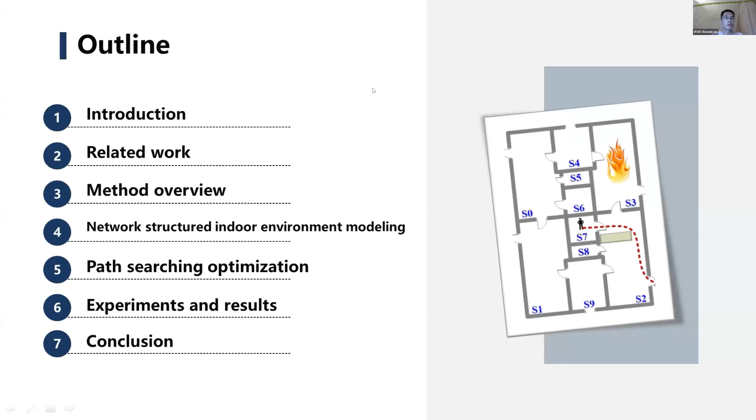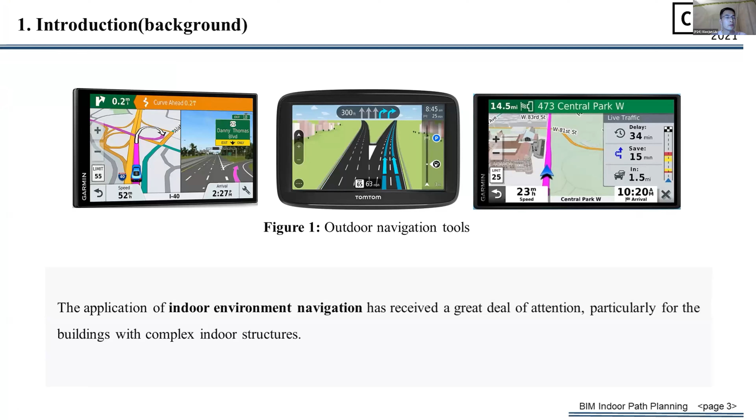introduction. With the popularity of navigation tools, especially those of smartphones or other lightweight devices, the application of indoor environment navigation has received a great deal of attention, particularly for buildings with complex indoor structures.

Their irregular and crowded indoor environment can result in emergencies at a high probability. One of the main reasons for these serious incidents is that indoor escape and evacuation are not efficient and timely. To avoid this situation happening, it's urgent to explore a lightweight indoor path planning method to meet the requirement of emergency indoor route finding.

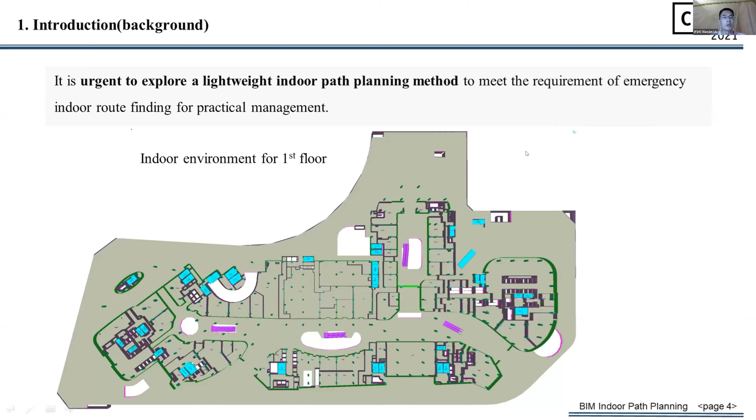For the building data, BIM has become the core technology in smart buildings, and its data has also been regarded as the source of BIM building information. IFC, as an international mainstream standard for BIM technology, is capable of storing both geometric and semantic information of building models, as well as their relationships. In this paper, we take IFC as our input data format for indoor environment analysis.

However, its rich information also brings disadvantages. For example, huge volume, high rate of redundancy, and lack of spatial information for data processing in practical applications, especially for lightweight indoor path planning.

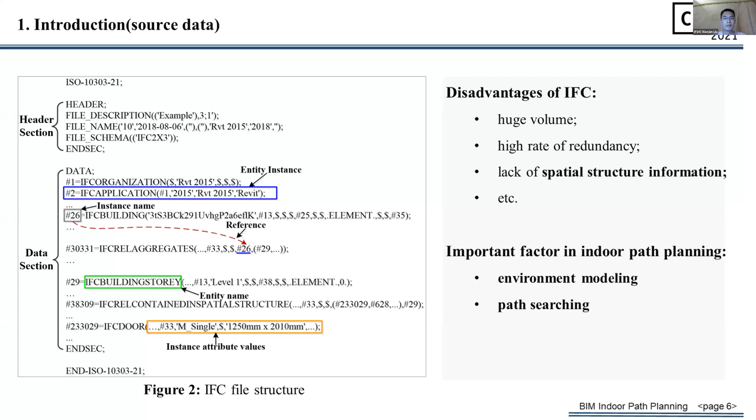Observing that both environment modeling and path searching are important, we integrate these two together with a lightweight approach, and our main contributions can be summarized as: first, a lightweight framework is designed in which all the online computation for a whole building is decreased to no more than 2 local interior spaces.

Second, a multi-layered network structure is proposed for indoor environment modeling and a corresponding automatic method for this structure generation. Third, a heuristic optimized A-star algorithm is implemented to speed up the shortest local path searching, especially for the case of path ends in a narrow corner.

As described above, we also give related work on indoor environment modeling and path searching algorithms. In indoor environment modeling, works for GIS appear relatively early, yet fewer works for BIM buildings are related with path planning. In addition, cell grid or topological structure is mainly used for modeling structure.

In path searching algorithms, the traditional and intelligent categories are classified by technical principle. In contrast, the latter category is more apt to address path planning with stochastic processes, while the other, which we are more interested in, is definitively capable of converging to a shortest path.

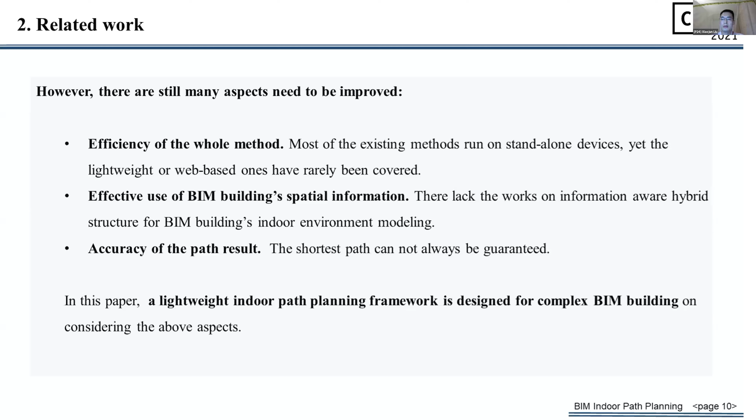In this paper, a lightweight indoor path planning framework is designed for complex BIM buildings considering the above aspects. As a web-based method, we describe our whole task as JPath, with online and offline procedures corresponding to the operations of the front end and the server side.

Meanwhile, due to resource limitations, we seek to develop our lightweight approach in which as large a portion of the computation as possible is designed to be offline, minimizing the resource consumption of the front end.

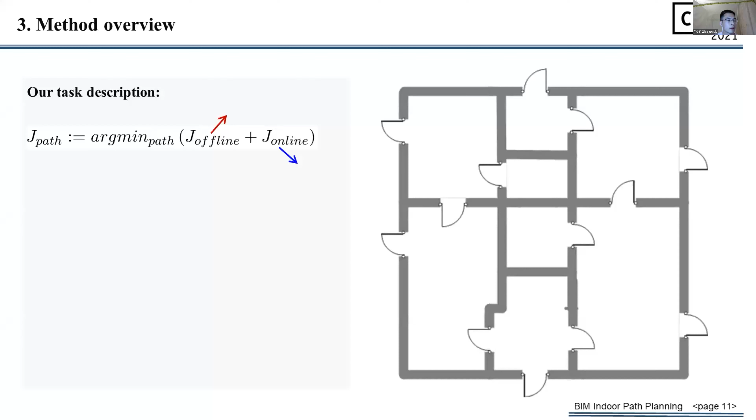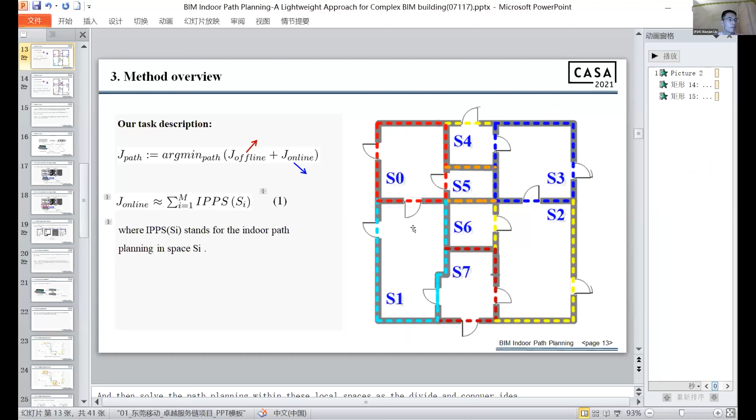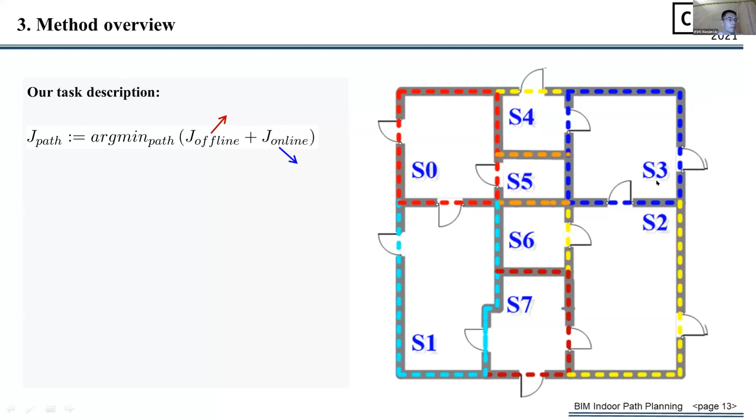Now, John, your video and audio seem to have stopped. Yeah, we can still see your presentation, but your video and audio seem to have stopped. Oh, we can hear you now. Just maybe if you want to stop your video and just try with just audio. I can't hear you now. Can you switch off your video and try just audio? I see you're speaking and I can't hear. Can you turn your mic on and off and just see if that fixes the problem? Maybe he can leave the Zoom and then come back again. Yeah, John, can you maybe quit Zoom and just come back, and if that doesn't work, then we'll play the backup video from this position.

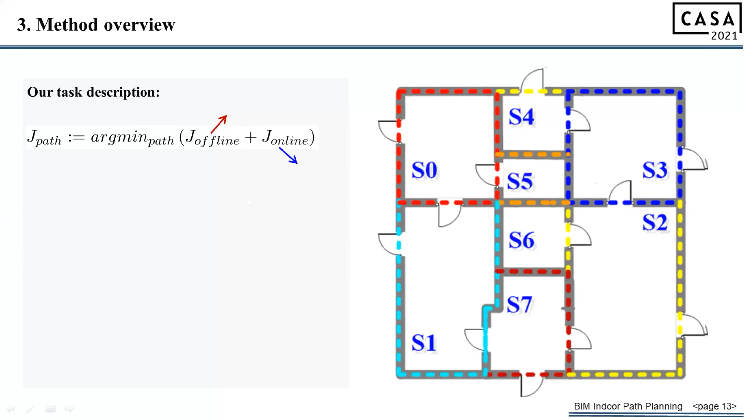It's also indicated that the overall procedure of path planning for the whole building is likely to be outlined and has been divided into a combination of M local solutions at space scale as equation 1, where the IPPS(Si) stands for the indoor path planning in space Si.

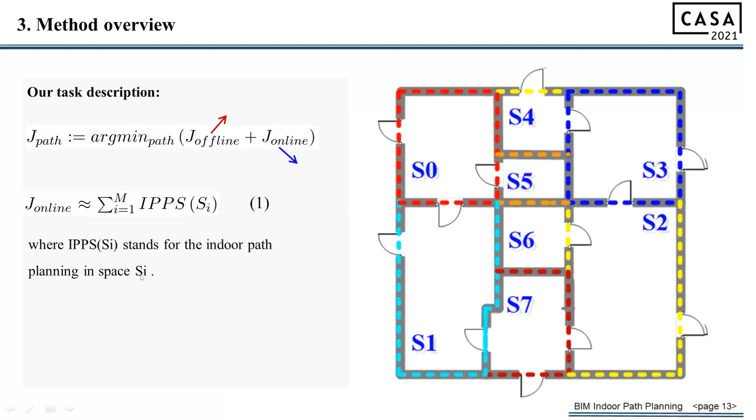With these spaces, we can notice that some information for their path finding is stable, such as the space S0, S1, and S7, because these subpaths connect some stable portals except for the two with dynamic endpoints, for example, S5 and S2. More clearly, all these subpaths, excluding the two dynamic ending ones, can be prepared beforehand because they are stable in the building.

And with this notion, it also represents that we can minimize the M in equation 1 to a constant value 2 in equation 2, where the S source and S target are the spaces containing source and target points.

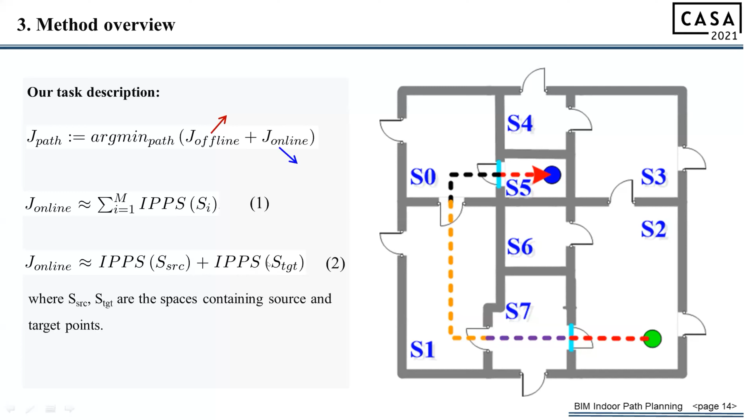In this way, the BIM indoor path planning has been designed with a lightweight approach in which relatively few operations are online on the front end, while the others are offline with one-time preprocessing. Given the ending points, including source and target, only the online two out of M IPPS operations will be scheduled on the website. Meanwhile, the environment modeling and IPPS operations have been involved as our key operations. And we will introduce them in the following section.

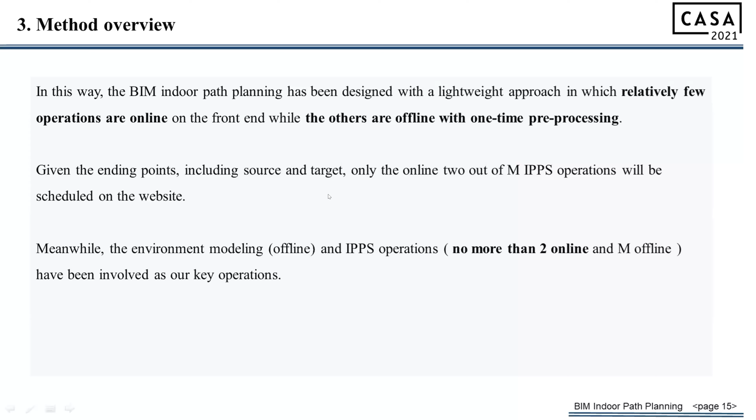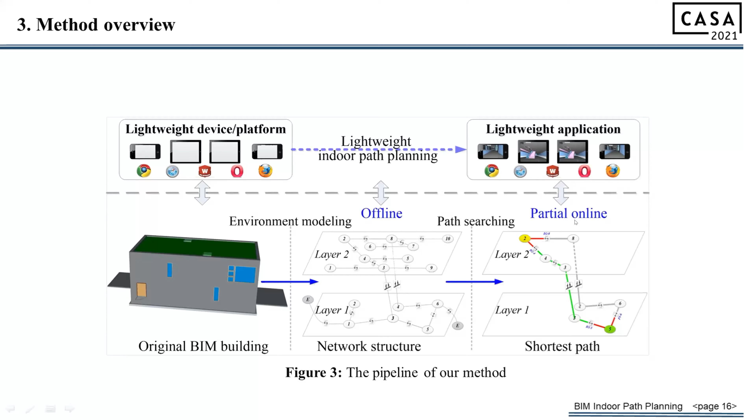Based on the partition spaces, the whole BIM building can be modeled into a network structure with space and portal nodes, and the pipeline of our approach can be shown in figure 3. As can be seen, with environment modeling and path searching, we achieve our web-based lightweight indoor path planning through partial online processing. In this section, we construct a network structure for indoor environment modeling in a top-down manner.

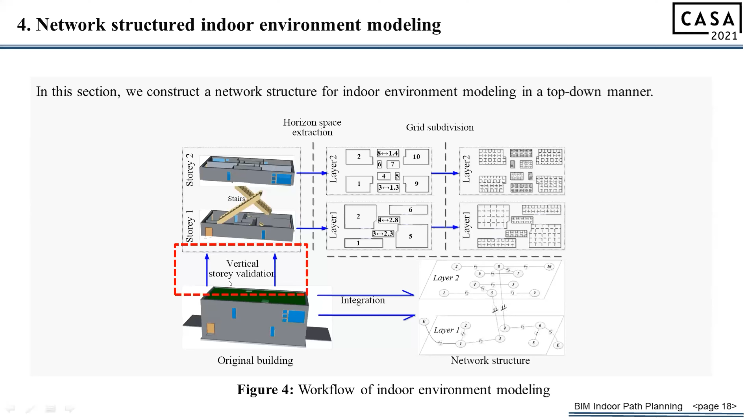It's organized from the building as the largest granularity, following story, space, and to grid cell as the smallest. The grid cell is generated as grid map for path refinement in one-time offline processing. Firstly, a semantic guided story validation is implemented to parse and examine the building stories for abnormal cases, for example, the walls across two floors.

In each story, considering the wall boundaries of interior spaces are almost sweeping results from their footprints, we propose a footprint analyzed space extraction based on image topological structure analysis. With this analysis, a hierarchy of the image boundaries is returned, corresponding with space boundaries. Meanwhile, a condition rule here from boundary closure is defined for space validation, and virtual boundaries are added when the condition is met.

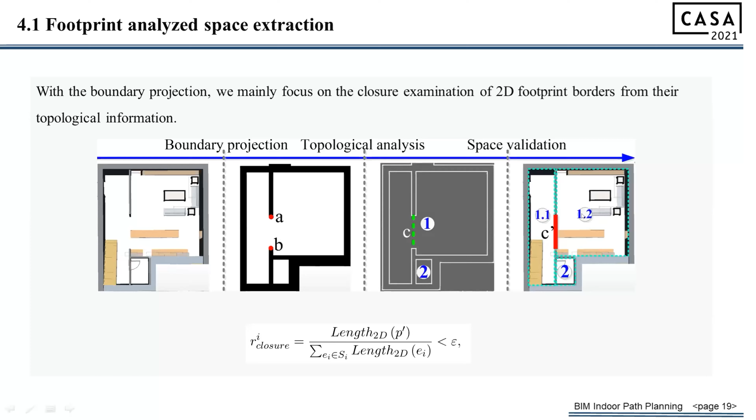In this figure, we can see a virtual boundary C is added between the point A and B for a logical space partition, and the space 1 is then partitioned into two smaller ones, named 1.1 and 1.2.

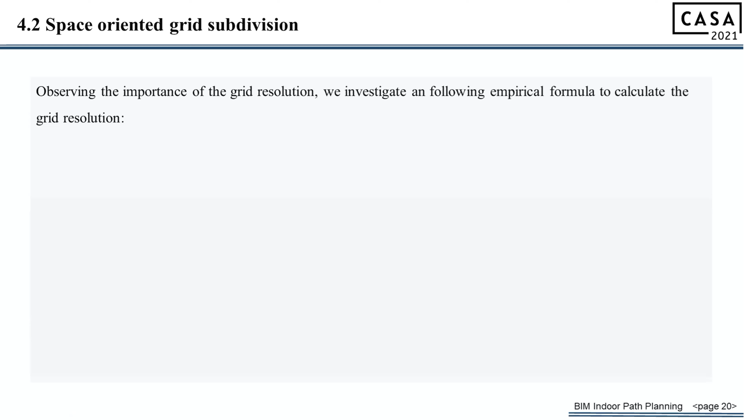For accurate pathfinding, a grid subdivision for the interior space floor is introduced to refine the floor map, in which the grid cells are evaluated with 1 or 0, depending on if it is occupied by any obstacle products. Observing the importance of the grid resolution, we investigate the following empirical formula to calculate the grid resolution, where this symbol means the roundup operation.

L star is the estimation of the space range in major direction star, including X or Y. C stands for the number of obstacle products in current space. A is the area of each cell, and lambda the empirical parameter.

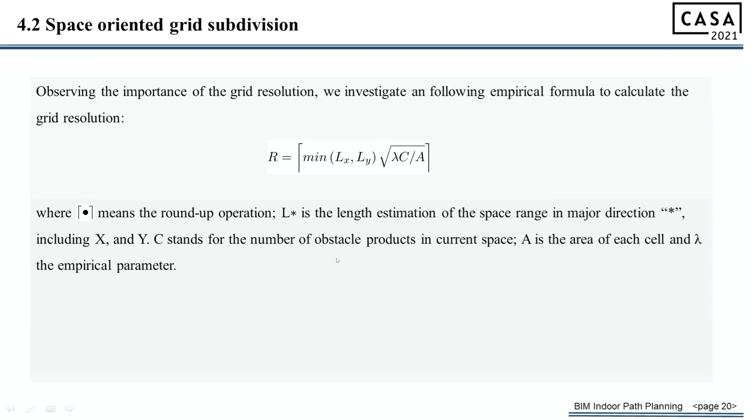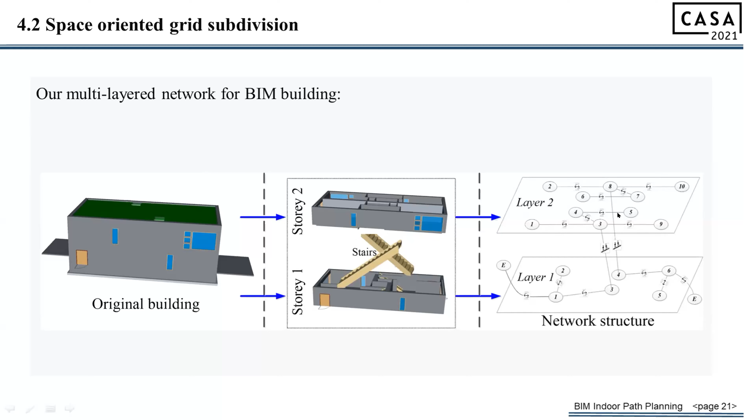With the top-down manner, the indoor environment of the whole building has been gradually refined from building, story, space, and grid cells. However, their relationships have not yet been unified. We integrate them as a multi-layered network in which the layers correspond with the actual building stories. Between the layers, the vertical spaces and the next door spaces with similar structures are connected if there exist vertical stairs or horizontal portals. With this network, we can flexibly design and optimize the path searching.

Based on our previous network structure, the main steps of our path searching optimization are network-guided global path selection and heuristics optimized local path searching. With the source and target position, we can firstly locate their corresponding spaces, for example, node 2 and 5 in this figure. And all the reachable paths that end with these two nodes can be accessed and selected from the network structure based on their path distance comparison.

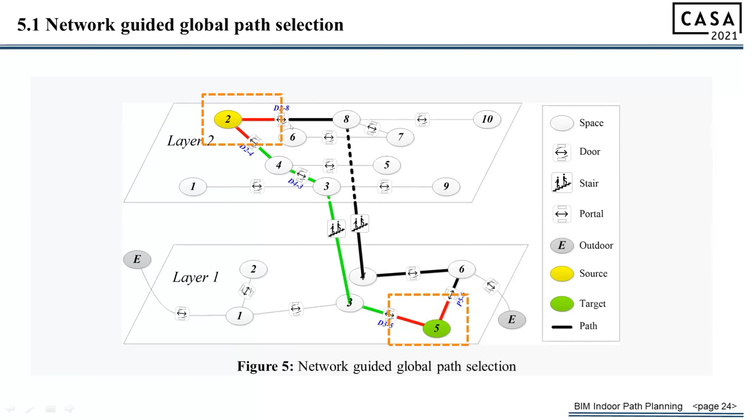In this figure, we can see two reachable paths with color. Meanwhile, as we know, to complete the global path selection, the paths in space 2 and 5 plotted with red line should also be given with IPPS operation. And this is the primary online procedure.

Moreover, we can observe that our global path selection can provide global guidance and dynamically avoid the path through the dangerous space. For example, the fire emergency in figure 6: the path does not go through space 3, even though this path has a smaller distance.

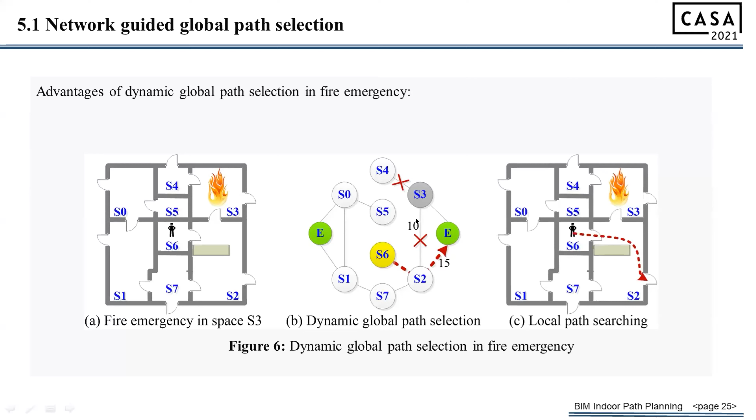First, we employ a bidirectional heuristic search from the two ending cells. Second, we introduce a stochastic phase in neighbor cell selection where there are multiple best choices. We set a high selection rate, P, for choosing the cells which are more consistent with the vector of the two ending cells, and a low value of 1 minus P to support further exploration for the smaller probability event.

To evaluate our method, we implement our approach with a web-based server in C++ and a front-end program in JavaScript for real-time local path searching. In offline indoor environment modeling, the experiment shows that all test cases can automatically yield a natural network structure with the same setting as the corresponding references. Figure 8 shows that the time consumption of our method is less than the other two methods.

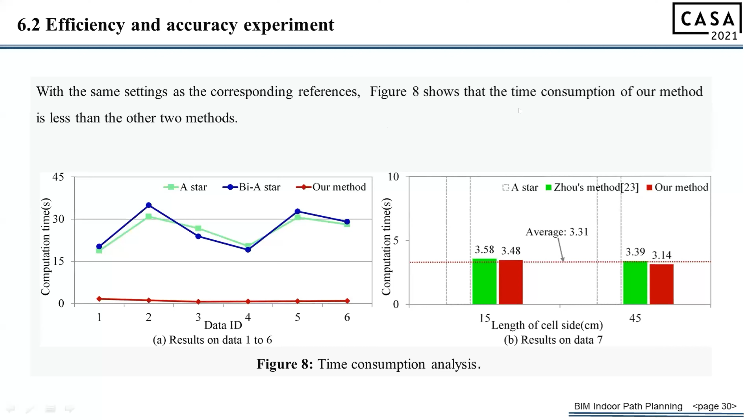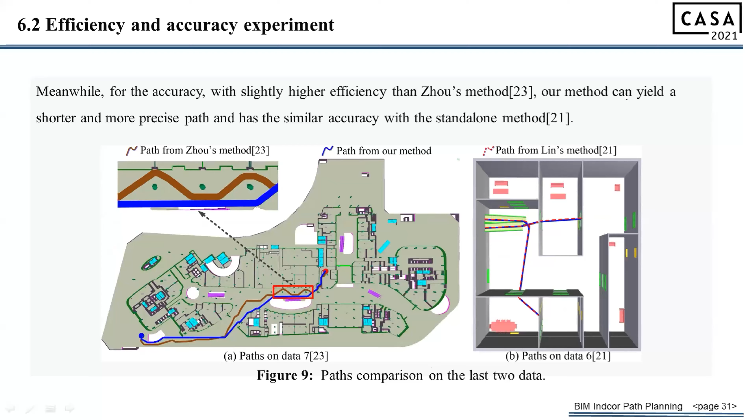Meanwhile, for the accuracy, with slightly higher efficiency than Zhou's method, our method can yield a shorter and more precise path and has similar accuracy to the standalone method. These are some visualization records from our experiments.

Conclusion: this paper presents an approach for lightweight indoor path planning in complex BIM buildings, taking the mainstream building data format IFC as our input data. We design a lightweight pipeline to integrate the indoor environment modeling and path searching with separated online and offline procedures. The final experiment shows that our approach can reduce the online computational cost drastically and can dynamically search the shortest paths in complex BIM buildings.

Meanwhile, there still exist limitations that need to be improved, such as the case of missing complex spaces on boundaries. In the future, we will enhance our method from these aspects.